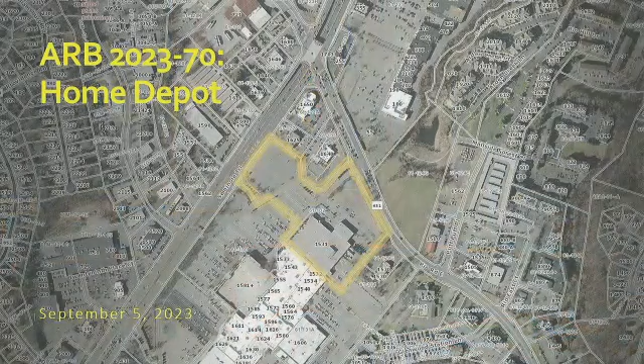There we go. The subject of today's review is the proposed Home Depot store. As you probably remember, in May you reviewed and recommended approval of the initial site plan for the project. In August, you reviewed and made a recommendation on the garden center and the outdoor storage and display proposal. So today you're reviewing the architectural design of the main store building for the first time, and also included is continued review of the site plan.

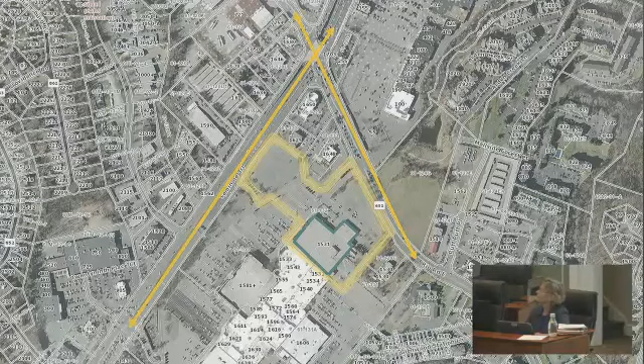As a reminder, the site is located at the north end of the Fashion Square Mall, where the Sears store is currently located. The site falls within two entrance corridors: Route 29 to the west of the site and Rio Road on the north, and the site is visible from both of those corridors.

This is the overall site plan for the project. In this slide, the orientation is 29 to the left and Rio at the top. The garden center is also at the top of the slide, and it probably looks familiar. All the display areas that were proposed are along the front of the building in the garden center.

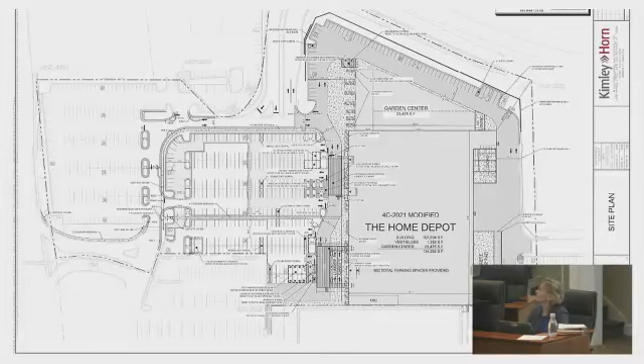So again, the architecture of the main store building is really the primary topic for today. The top elevation is the one that faces Route 29. It shows the store with the garden center at the left. The middle elevation is that same store elevation without the garden center. And the bottom elevation is the one that faces Rio Road, and it shows the garden center between the main store building and the corridor.

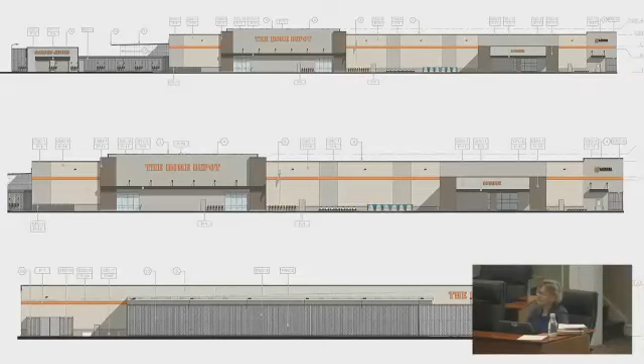The proposed building form is a big box. That form and the proposed design treatments are clearly contemporary, and they do not reflect the traditional architecture of the area. However, the building form and scale are generally consistent with the remaining mall building. Note, however, that the mall predates the establishment of the corridors. It does not comply with the guidelines, and it will likely be replaced at some point in the future.

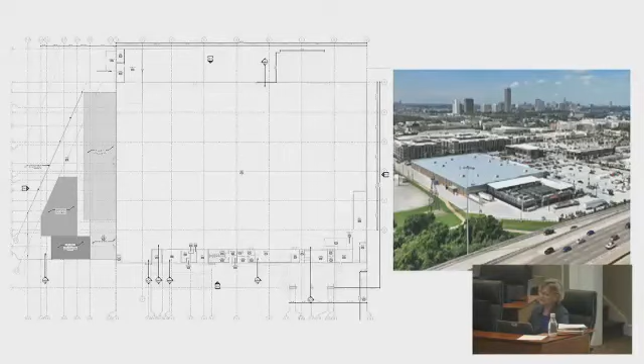The building's deep setback from Route 29 and its position below Rio Road help reduce visual impacts. And as indicated in previous reviews, landscaping that meets the guidelines can help harmonize this non-traditional development with the overall corridors. It can help offset visual impacts and support unity and coherence along the corridors as called for by the guidelines.

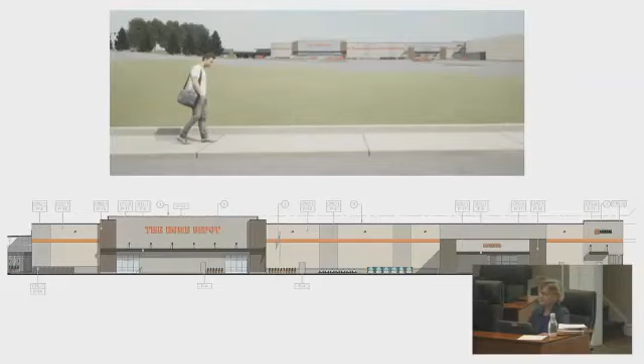The elevation facing Route 29 is a long one, broken up by the main store entrance and the lumber canopy, and by changes in color. There are also texture and material changes proposed, but color is what will be noticed from the corridors. Incorporating architectural features noticeable from the street to help break up the mass, rather than relying solely on color, would be appropriate.

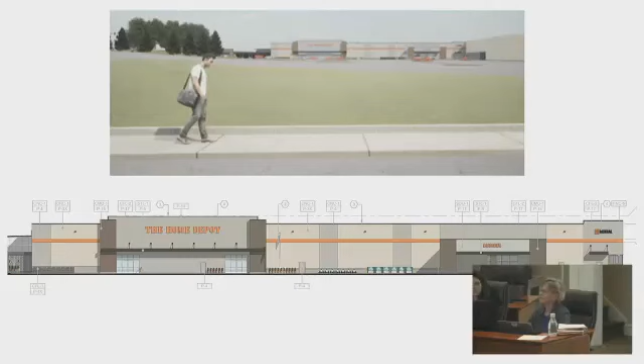The methods of breaking up the building mass don't really achieve a human scale for the building. Additional architectural features and detailing could be used to better establish that human scale and relieve blankness. We made a few suggestions in the staff report to that end.

They include extending the beam above the main entrance to create a canopy, as seen in the example provided in the submittal. That would not only provide weather protection but could also add visual interest and human scale and help reduce blankness.

Providing vertical supports for the extended canopy, also shown in the image in the submittal, would further establish human scale and a connection to historic architecture.

We've also noted that the entrance features share some design elements, and we've recommended revising the piers and siding element of the lumber canopy to match the main entrance for a more coordinated appearance.

Moving on to the Rio Road elevation, only the upper part of that elevation on the main store building is expected to be visible above the garden center. That portion of the wall really has no architectural detailing.

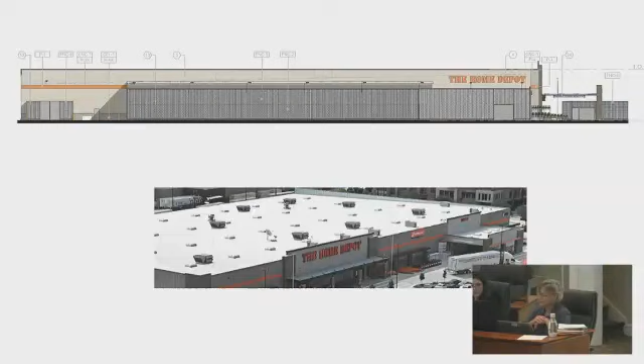The plan at this point doesn't show it, but rooftop equipment is expected on the building. Given the elevated position of Rio Road, it's anticipated that standard parapet walls will not provide sufficient screening. The bottom image in this slide shows a typical store with the rooftop equipment.

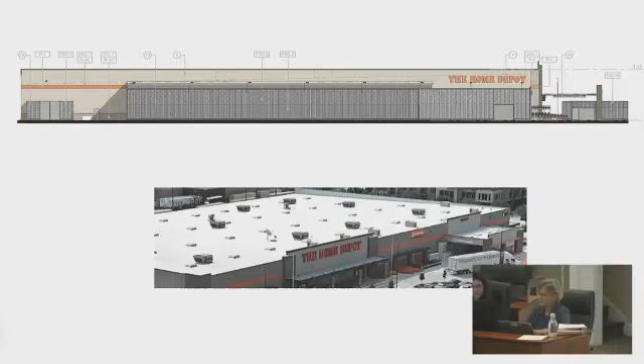So we've recommended that standard information be added to the drawings to show how visibility of the equipment will be eliminated.

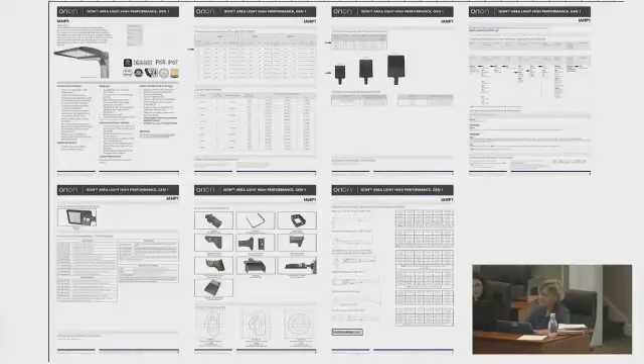Cut sheets for light fixtures were included in this submittal. Lighting information is not complete, however, so we've made a few recommendations in the report to address that.

Finally, landscaping is also part of this review. You previously discussed landscaping along Rio Road. Trees and shrubs there can contribute to screening of the garden center and the storage and display. As a reminder, it was determined previously that the buffer alternative shown on the plans was not appropriate.

You also considered landscaping along the Route 29 frontage relative to outdoor storage and display. Staff had recommended that entrance corridor frontage trees be provided, given the extent of the redevelopment proposed. Your decision was to recommend a condition requiring the standard planting or an acceptable alternative within the existing planting area.

The guidelines also call for interior parking lot trees, perimeter parking lot trees, trees along internal roads, trees along pedestrian ways, and trees to soften long building elevations. The layout of this site is such that some of the tree types would double up. For example, an interior parking lot tree might also count as a pedestrian way tree.

But at this point, only the interior tree count appears to meet requirements. That's assuming you're not looking at the lot closest to Route 29. So while there may be some double counting of trees available, additional trees are still needed to meet requirements.

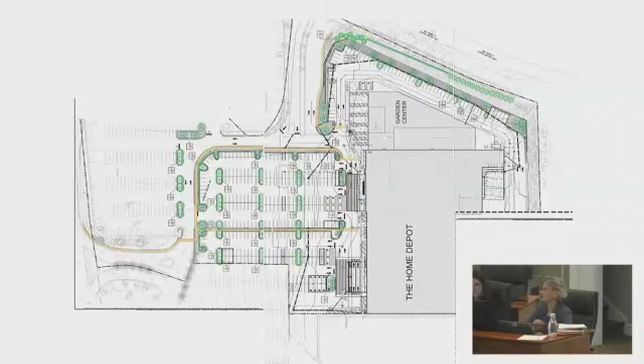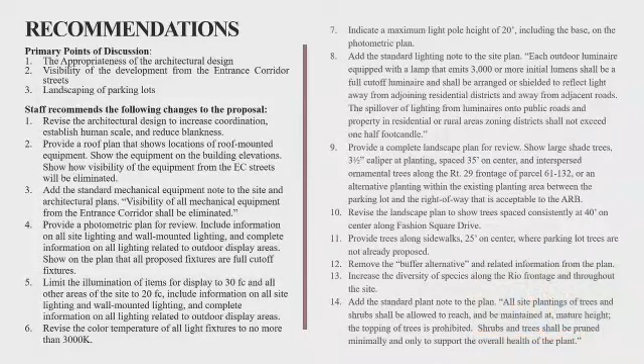So we've recommended several revisions to the site and to the architecture. Those could be provided with the final site plan submittal. I'd be happy to try to answer any questions you might have.

All right, thanks a lot, Margaret. We'll go into questions. Frank, do you have any questions?

Just one question. The last drawing we were looking at, Margaret, what does the yellow line represent? It was outlining some of the parking areas. Not this drawing, the yellow line on the last drawing. Sidewalks. Okay.

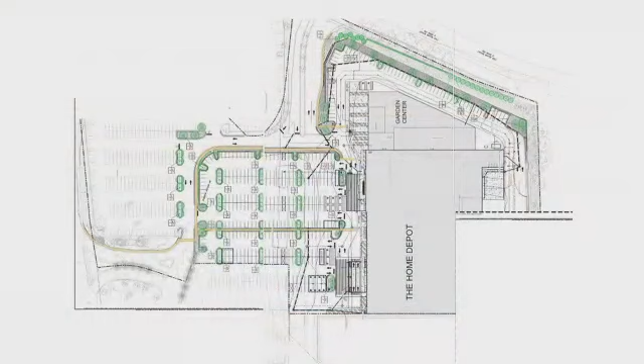But the property line for this is shown along 29, is that correct? This is the property line, what's shown in yellow on this side. Okay, perfect. Thank you, I don't have any additional questions.

Thanks. Dave, do you have any questions? I don't believe so. Thank you, Margaret, for clarifying the landscape revisions requested at the last meeting. Those will be the subject of a future application for the site and not included in the architecture today. I think everything will be caught up with when a final site plan is submitted. Okay, thank you. All right, thanks.

I do not have any questions. So if the applicant has a presentation, now is the time.

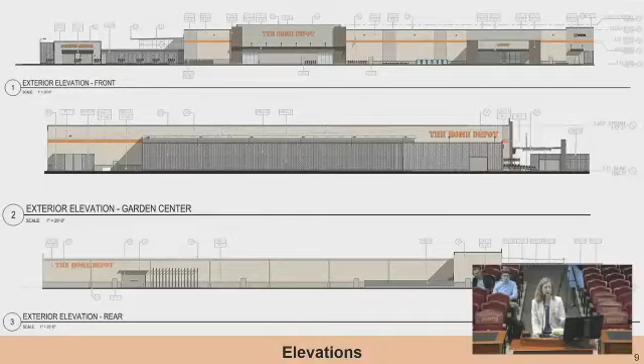Margaret showed these - we can come back to these as needed. We have some closer up shots if that would be helpful, which we can refer to. Again, the architects will talk more about this, but we wanted to point out that the roof line is this dashed line, and the parapet is above it.

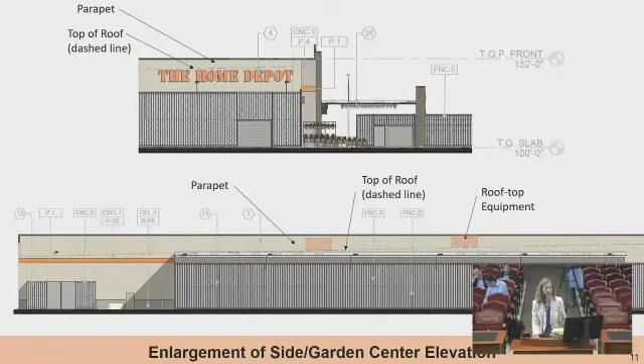It does angle a little bit - the roof slopes back towards the rear, away from the front of the building. Likewise here, I think the parapet is about 8 feet tall on this end, and it goes down to a foot or two on this other end. But we highlighted where the rooftop equipment is proposed, to demonstrate that it will not be higher than the parapet roof.

These are some renderings that we showed last month with regard to how the garden center looks attached to the building and the outdoor display areas.

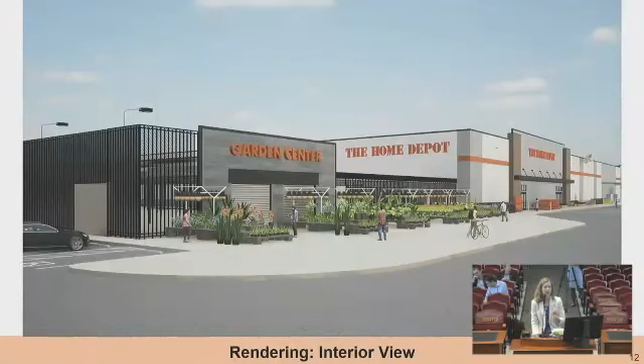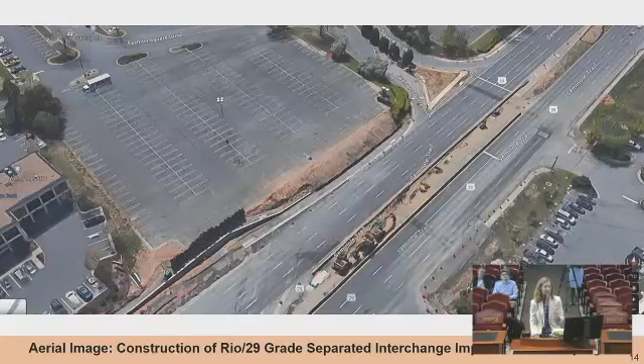I'll show you a second picture from the exact same spot, this time an elevated image. You can see the area where they took the trees out, and there's a retaining wall under construction in this location. That's why it's challenging, and I think the reason no trees were returned is because the area is also full of utility easements. This is an image of that same location today.

Obviously the retaining wall, and further south on the road is just grass where those trees used to be. There's a lot going on in this image, with Route 29 at the top of the page.

We show this area from an ALTA survey prepared recently, showing all of the utilities. The highlighted area in green is where we talked with you a month or so ago about our desire to put trees, but the limitations are that we have a tight amount of space between the red line, the right-of-way line, and the curb, which we didn't want to tear up yet because we know it will be redone as part of the second phase of redevelopment of the mall.

We'd hoped to use this entire green strip, but there's a county service authority easement here, and utility easements where VDOT reserved the right when the project was done. We hope VDOT will let us put some small plantings in this area, but we do have to get their permission. That would be the extent of the area we have to work with.

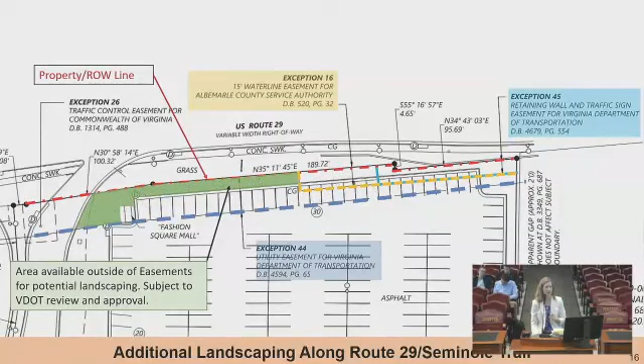This is an image of our site plan regarding comments number 10 and 11, about providing more trees along Fashion Square Drive to supplement what is there already. To meet the standard of 40 feet on center, there's not a lot of room for that.

Each tree would eliminate a parking place, and we still have to get Home Depot's permission, but we think we could fit two trees in that location that would each eliminate one parking space, getting about 50 feet on center, closer to compliance with the guidelines. Then two additional trees in this location. This is the front of the store for reference.

And this is an example of the Costco store. Let me back up one step - for lack of a better word, we're calling this a spine sidewalk through the middle. It's always challenging with infill development like this; we're not starting with a raw canvas to work with.

We really want to add this spine sidewalk, but to comply with the guidelines requiring trees along sidewalks at 25 feet on center, we would have to widen this area substantially and add landscape islands all along the way, much like this, which is the newish Costco.

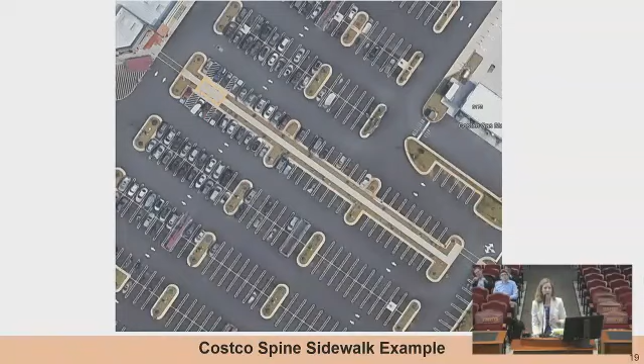So we're asking for your support and a little flexibility on that guideline so we can have the plan look like this, still have room for that spine sidewalk, which we think is important for connecting pedestrians from Route 29 to the store. But if we have to meet that guideline, we would lose this entire row of parking. We can't go beyond this line, which is the property line - Belk owns everything here. So we're trying to work within the area we have and get as close to the guidelines as possible.

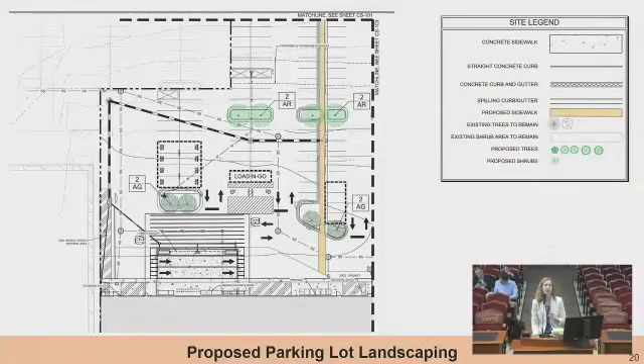This is showing a closer view of some of the existing and proposed landscaping. This, for Mr. Hancock's benefit, we showed last week - this is the proposed planting plan roughly along Rio.

There is a condition of approval for the outdoor storage and display requiring greater variety in the plantings here, which, as was noted, will be incorporated with our next submittal. Again, we're adding trees and plantings wherever there is space. It is tight in this area because it's a pretty steep slope down to the parking lot.

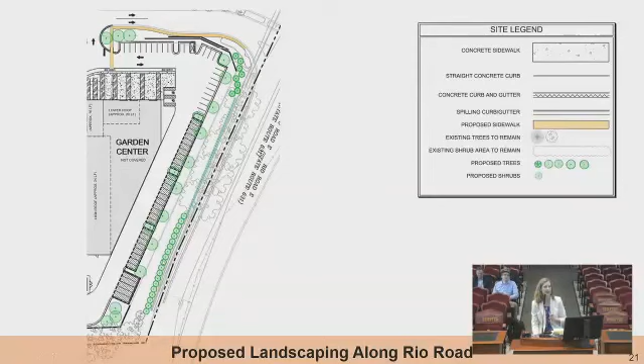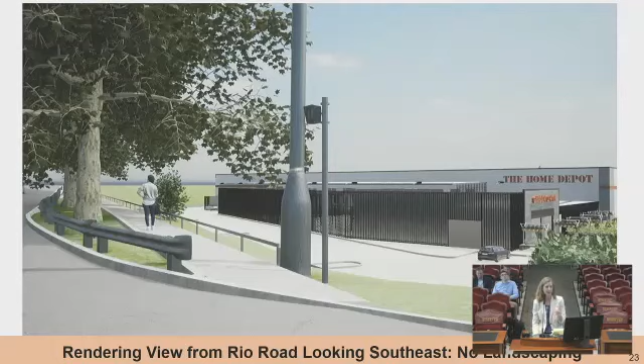We showed you this view already. We have some renderings trying to demonstrate—obviously this is without much, really no landscaping. We do think there is a tree right here that provides a little bit of screening in this area, but you saw from those other images there's not much screening there now. Based on what we're proposing at full maturity, it would be substantially screened.

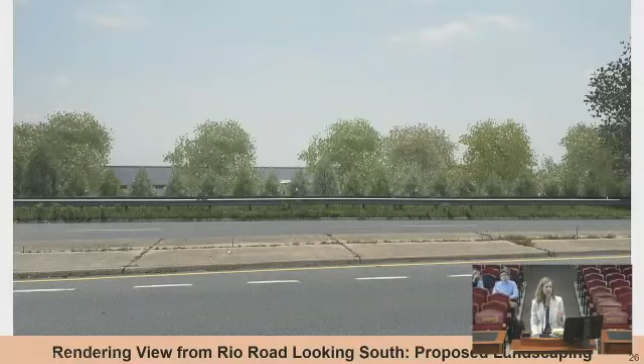And then likewise, the view from Rio on this end with the plantings proposed will help break up the visibility fairly well. And then likewise from this location for pedestrians walking along, at full maturity there.

If I may, I will ask the project architects to come up and talk with you a bit about building design, rooftop equipment, and so forth.

Okay, thank you. So, in response to the staff comments, I just wanted to address a few of those here. You guys called out the Lower Heights location we recently built. We're very proud of that project in Houston, Texas. It's a great project, and I think we can use a lot of those strategies here.

As you pointed out in the recommendations, there's some changes there to the canopy, which I think we can look at adding here—that's a great way to increase the human scale of the entry there. Adding the piers, again, that's a direct thing we can take from that project. And in that project also we're showing some trellis elements along the front of the building, which will help increase the human scale there. So basically, I think we can take your recommendations directly and should be able to accommodate all of those.

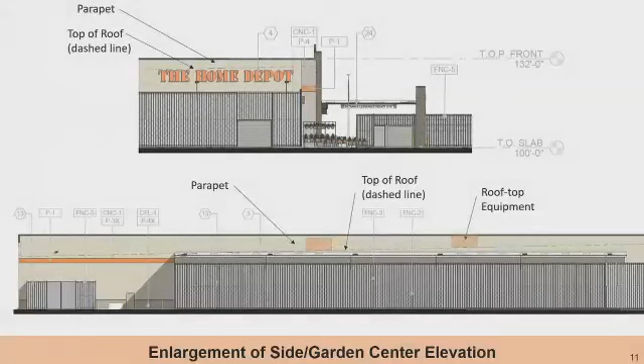For the second comment, discussing the roof plan in order to look at rooftop equipment—I did want to mention, as Valerie had said, on the elevations here we do actually show the rooftop units. They're behind the parapet, so it may not be super clear in the elevations we submitted, but she called this one out here with some additional lines on it. So we do show two lines of rooftop units, which are behind the parapet. This parapet goes to 32 feet on this side, so we're increasing the height compared to the Sears—we're increasing the height of the building by 10 feet.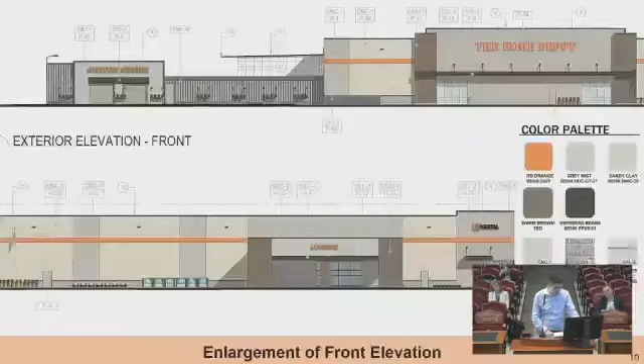This roof slopes back, which helps us a lot to conceal the rooftop units. We're at 3 feet below the parapet on the front side of the building by Route 29, and we go back down to over 8 feet at the rear. So it's a pretty big slope, and there's a lot of room back there for some of the rooftop units to be hidden behind. Also to that point, from the existing views on Rio Road, we're basically increasing the building height by 10 feet, so that moves—if you look at any of these perspectives—that's going to move the parapet height up above the viewer's eye line, which gives us a lot more room as you recede past the parapet to hide things because of that angle of perspective. I think that helps a lot in addressing that comment.

As regards to the third comment, I think the language is very strong there. As Valerie pointed out, we do have this rear corner which is very difficult—I can't 100% know exactly what that looks like from here. But we are adding that additional landscaping, which I think combined with the increased parapet height goes a long way towards reducing the visibility as much as feasible. Is there any questions on any of that?

We'll just go through and see if board members have any questions. Dave, do you have any questions for the applicant?

I guess just to appreciate the additional emphasis on the landscape and the screening that may provide, and also the description of the parapet. I think for future reference, it may be helpful if y'all could develop some site sections that would demonstrate whether they're visible. I think my understanding is the guideline is written to require the elimination of any visibility, and so that's the standard we're working with under the current guideline. Appreciate very much the mitigation and reduction that the strategies you've described will provide.

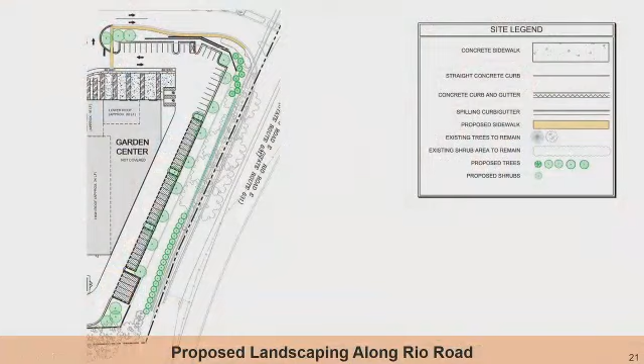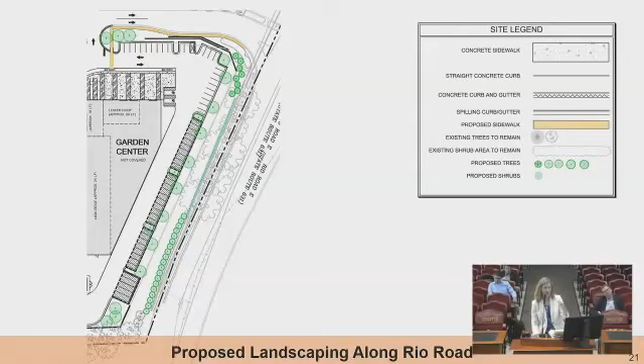Everything shown here is what we could fit into that area beyond the overhead power line easement, but it also slopes down pretty steeply. So we tried to do as much as we could within that area, but there's two guardrails - one right next to the road drive aisle, and then there's trees. Let me go back to the original images. So you've got the road, the road guardrail, then large mature trees, sidewalk, and then a second guardrail, and then it slopes down steeply. So what we've tried to do is fill in as much as possible with some small shrubbery, mixed in with something a little bit larger.

We did, and for your benefit, Mr. Hancock, we knew from the beginning this angle and the one in the opposite direction would be the most challenging to mitigate views of the store itself as well as the rooftop equipment. One option we proposed, though we didn't expect anyone to want it, was a wooden fence. That was a proposal we put forward, but it was very clear at our last meeting that was not preferred, which is fine with Home Depot. It's just a matter of showing they'll do everything they can with the area they have to work with, but it'll remain challenging.

So with all infill development, you're dealing with existing utility lines, strange topography, and old building standards. Like the sidewalk - we thought that sidewalk was more important to have, even if it didn't quite meet those guidelines.

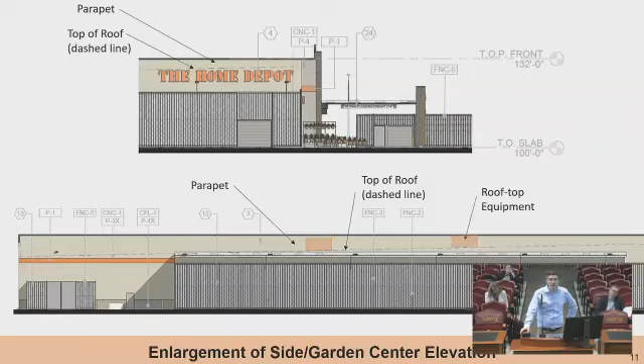I know that adding screening around the units is not preferred, so we'd look at incorporating it into the building design itself. All right, great, well thank you.

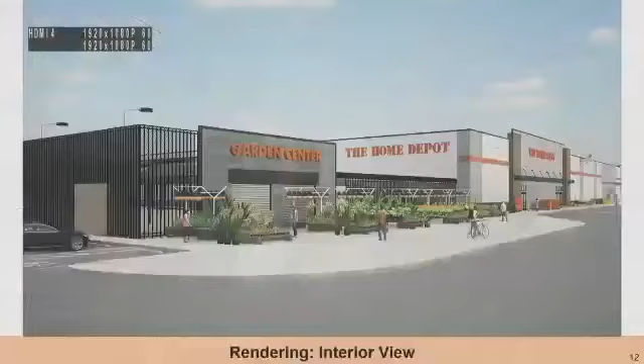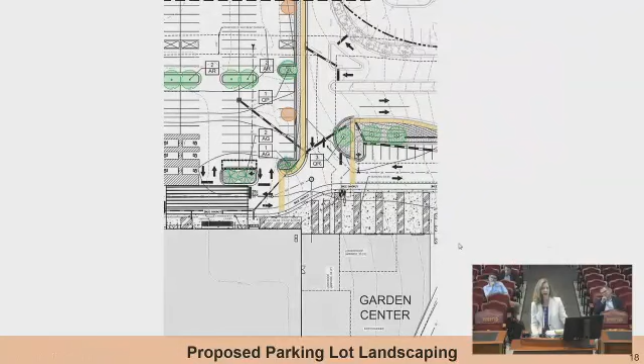Could we add more to make up for where it's a little short in other areas? We do have an exhibit showing them here. We still have to get Home Depot's approval for this, because each of those eliminates a parking space. But if that would address the concern and be acceptable, that would help us. So then that would be referencing sheets 17 and 18 of the presentation? Yeah, and we'll show these trees here — there were 2. Is that the right area? Am I pointing in the right spot? Yes.

Thank you. So just to clarify, all those trees in those 2 areas — technically we would consider those interior parking lot trees. So they'd be doubling as your travel-way trees, your sidewalk trees, perimeter trees. Is what's shown there something you're satisfied with? No additional trees — you're okay with the trees being sort of double and triple counted? I guess I may not have been as aware of that. I had understood that these were meeting one requirement.

Margaret, can you quantify overall the number of trees? Quantified? No, I cannot give a number. I think my intention in that exception was that if these are travel-way trees, that's the requirement of the 40 feet — that, for travel-way trees, was acceptable. I didn't mean to be saying I was evaluating interior parking lot or other trees in that context.

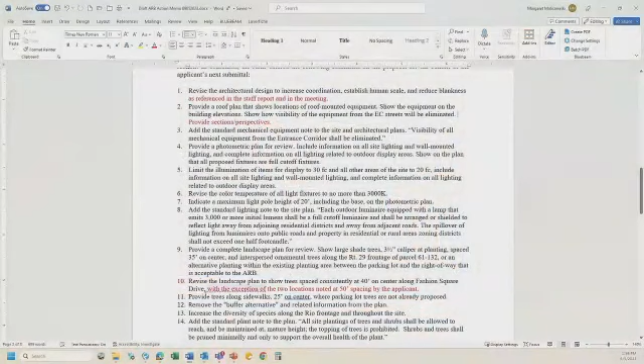So I guess my comment would have been that if we put travel way in front of trees - that was my understanding of the issue, but I don't know, Frank, Chris, if you see it differently.

Yeah, I mean it's tough because it's a retrofit and we're meeting up with what we're calling an interior drive. It's essentially a drive aisle, a parking lot and spaces. I don't know that I'd hold it to that same standard as an interior road. What's the language in the design guidelines - is it interior travel way or interior road? Interior road. It has a name, but it doesn't really feel like a road to me.

Yeah, I think by leaving this comment in, it's still an issue for the applicant to address. Looking at that exhibit, it looked like there was a little room to add some trees that weren't necessarily parking lot trees, but were adjacent to the sidewalk, between the sidewalk and the curb. So I'd encourage the applicant to look at those spaces. But given this conversation, I think maybe we'd be a little lenient on that, because the definition of a road is maybe a little nebulous here - whether it's a drive aisle or a real road. And if you zoom out and look at the amount of trees Home Depot is adding, I think it's going to have an impact, especially considering what's there now.

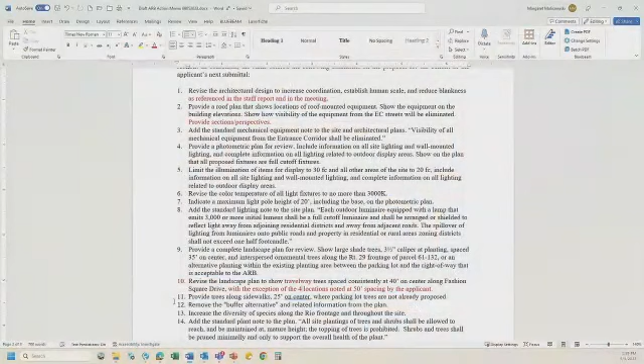Yeah, I think those comments are helpful. Just want to make sure everybody has the same expectation. So I think if we leave 10 and 11 in as they are now, you'll have another opportunity to review a complete landscape plan, and I think this helps emphasize your point that trees are maybe double and triple counted, but as many as possible is the goal.

Yes, and like the applicant was showing trees where they weren't really touching Fashion Square Drive coming in off 29, so they're adding trees there. So anything like that, I think we're willing to work with you - we're not going to sit there and say every 40 feet or 30 feet.

So technically, this is a preliminary review. Traditionally, what you've done for preliminary reviews is just come to consensus on the comments and provide them to the applicant without a motion. But if you prefer to make a motion, that would be fine as well. Happy to stick with our past practice. Yeah, we don't need a motion then.

Move anything. All right, so in that case, I guess there's no motion, no vote. Thank you - I guess if the applicant doesn't have any other questions or comments, we'll move on. Thank you. All right, thanks a lot.

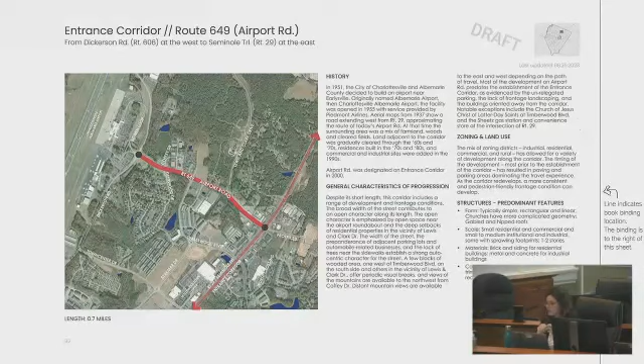So thank you again, everyone, for your continued work on the effort to identify common elements and historic aspects along each of the county's entrance corridors. Today we have a draft of Route 649, Airport Road, for your review. This corridor is a short one, with a length of 0.7 miles. The corridor demonstrates a range of development, which hints at its underlying zoning districts in the area that include industrial, residential, commercial, and rural. Most developments along the corridor predate the establishment of the entrance corridor design guidelines, which is evidenced by unregulated parking, a lack of frontage landscaping, and buildings oriented away from the corridor.

Exceptions to this include Church of Jesus Christ of Latter-day Saints and Sheetz. Overall, there's an open character to the corridor with its broad street width, emphasized by open space and deep setbacks. Although this allows for distant mountain views in both the east and west directions, coupled with the preponderance of adjacent parking lots, automobile-related businesses, and the lack of trees near sidewalks, the corridor has an auto-oriented character.

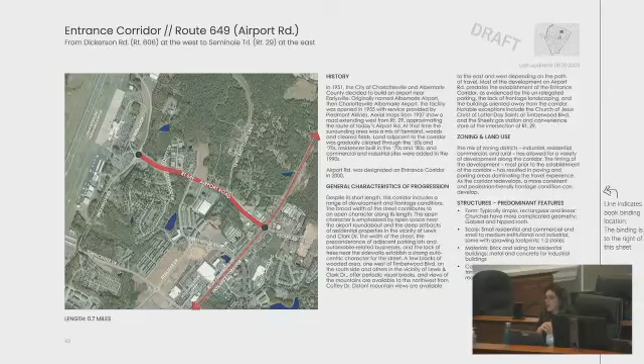As usual, we included a list of predominant structural and landscaping elements, as well as a list of features to maintain and avoid. Some of the unique aspects along this corridor were more complex building forms seen in churches as opposed to other buildings, and continuous sidewalks, but a lack of street trees.

In the precedent images, we show existing development examples, most having deep setbacks, but across different uses.

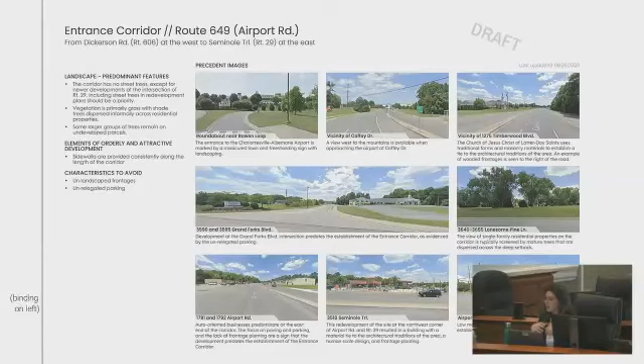And unique to other corridors, a designed gateway to the entrance of the airport road entrance corridor in the form of a low stone wall with signage on both street sides that curve inward towards the corridor, which is seen in the bottom right image.

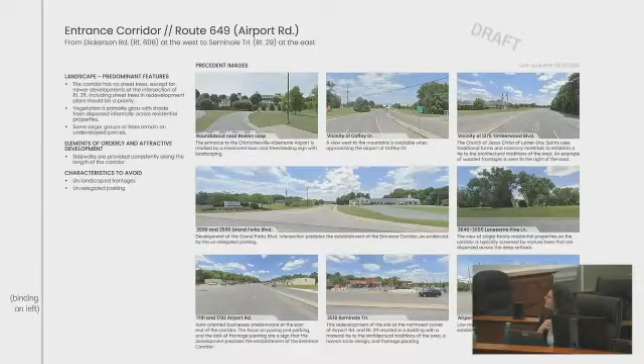Well, I tried to. It's very small. Got the red, that is the red. Yeah, I tried other colors, but it kind of got lost in the rest of the image, so I stayed with red. But if you have suggestions, I'm open to suggestions.

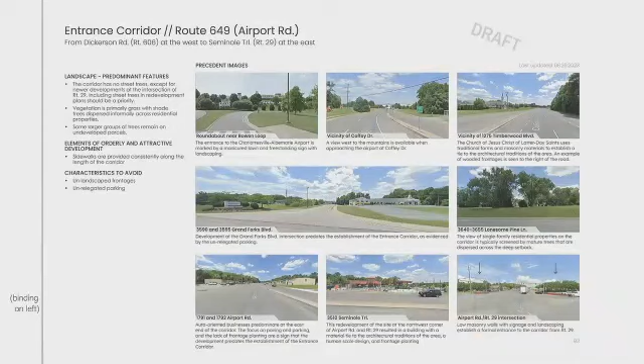Yeah, so that's the end of this. Well, that's all we have for this corridor. We'll navigate back to the first sheet for discussion.

Is this the shortest entrance corridor in the county? Or maybe Barracks Road is pretty short. 151, that little portion of it is pretty short too. It's in the top 5 for sure.

It's pretty interesting. I mean, it's as short but significant as it is, since it's the primary entrance for everybody coming from the airport. Yeah, what a mishmash.

And I guess your point about zoning is a good one. That's not obviously the purview of this board, but I struggle a little bit to figure out how ultimately it's going to evolve in a coherent way when the zoning is as different across it.

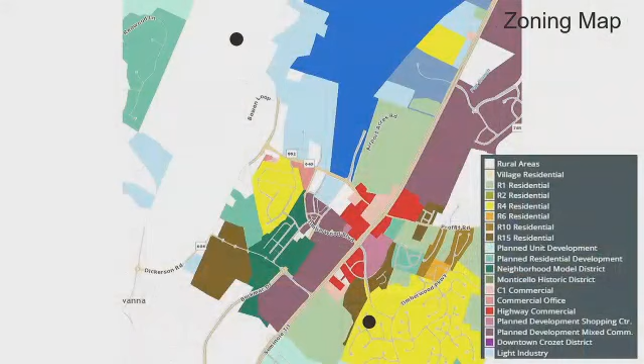So this is the view of the different zoning districts. What's the dark blue? Rural, or I think that's heavy industry. Oh, heavy industry, okay. PDIP - Planned Development Industrial Park, okay.

I should disclose that I work at the UVA Foundation, and Lewis and Clark Drive - I'm working on the North Fork project, so I don't want to say too much, but that's the North Fork parcel, that PDIP.

I'll just echo Dave's comment of how important this corridor is, or is going to continue to be as it develops.

It feels to me like it's recovering from a VDOT project, but like anticipating future growth - not saying that's a bad thing, but it's like it just hasn't grown in yet. But the infrastructure's there, the sidewalks.

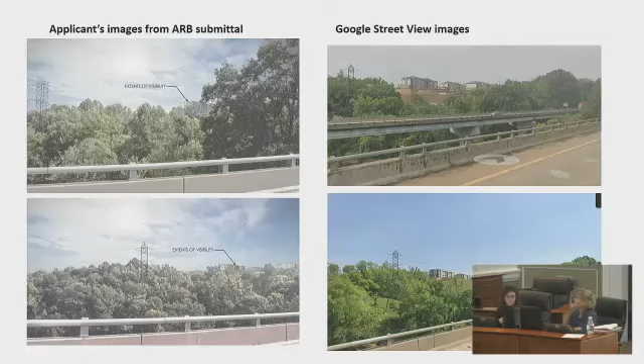On the left in this slide are images from the applicant's submittal to the ARB, and I tried to pull some Google Street View images from similar locations for comparison. I think you can see in these slides that the retaining walls are significantly more visible after construction than was suggested in the earlier submittal. These images are showing the same, possibly a little more visibility for the buildings themselves as well.

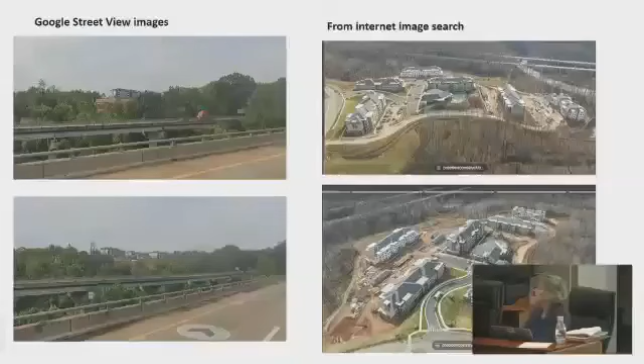On this slide, we have Google Street View images on the left, and then some aerial views of the development from the other direction on the right. In those on the right, the interstate is at the top or the back of the development, just to show you a little bit of the layout of the development and where the trees do stand.

And then in this slide, upper left corner, aerial view from the applicant in their earlier submittal. You can see there along the retaining walls, there are trees shown at each terrace level. Those did not carry through to the approved plans, and we stopped focusing on that based on the perspectives that were submitted. We just didn't think the retaining walls were going to be seen, so we didn't think they needed more landscaping to soften that view.

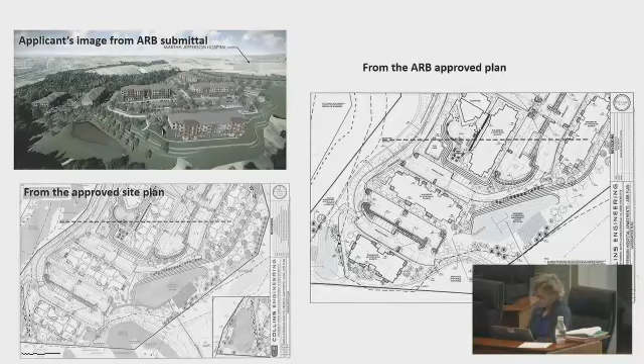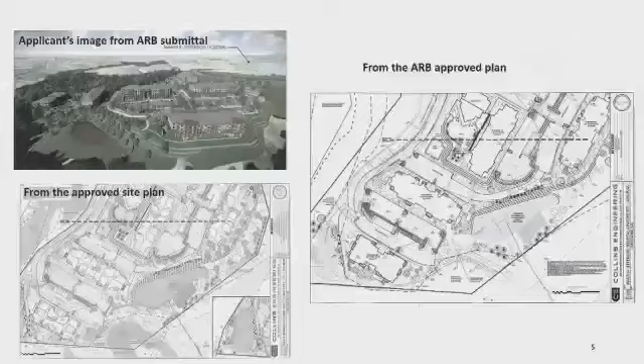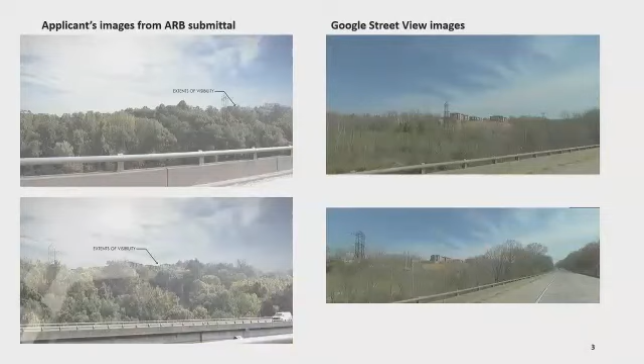And this is the site plan that was approved for the project. So I think what's happened is the images that were put together, those on the left, overestimated some of the wooded area that was off-site and how that contributes to or doesn't contribute to screening. Also, the images on the right in this slide, the trees don't have all the leaves on them. I think if you drive by today, though, you do still see the retaining walls even with the leaves on the trees.

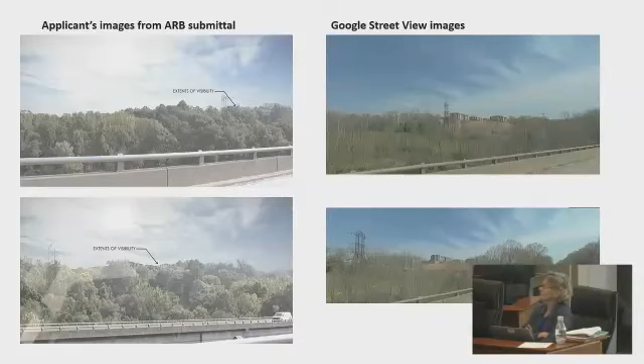Well, Margaret, thank you so much for assembling these materials and the views, which I think are very helpful at documenting the issue. I guess an open question I have for you and colleagues is, obviously the applicant made representations about the visibility in their official submittal and presentation, which proved to be very different than the ultimate visibility. The site plan is one thing, and you're correct, it doesn't contain screening on site. I don't know, is there any formal action, recourse, or enforcement that we would have to ask the applicant to provide landscaping or other means to match the development after the fact to their representations during the process of getting the certificate of appropriateness?

Those are good questions. We can certainly talk with our code compliance officers. I looked to the site plan, and assuming that the planting was done as it's shown here, are there other areas to add planting on site? To help with that view, I'm not sure that anything's available on site.

And I guess I don't know, I'd be interested, Chris and Frank, in your perspective. I think it might be constructive to ask the applicant to appear before us and explain the difference between the presentation and the reality, and just to register that we expect their representations to be good faith, accurate ones. And I would also like to know who prepared the presentation, so that when applicants present materials to us in the future, we know whether or not they were involved in this.